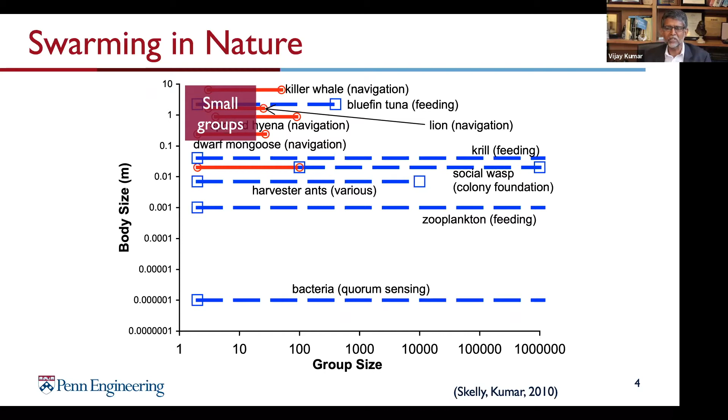But in small groups, individuals can be labeled. They can learn to identify their neighbors. And things are a little different when you get to larger groups, which I'm going to call flocks, with group sizes from 10 to 100, where the combinatorics become very hard.

And yet you want to retain some sense of identity, as opposed to swarms, where you can have abstractions where you ignore the details of the individual, ignore the labels, and assume that the agents are altruistic, replaceable, maybe even anonymous, with communication that's completely indirect.

So in some sense, the hard problems are in the middle. At the smaller end of group size, you can brute force the combinatorics, you can come up with calculations, and even if it's NP hard, you can kind of do it by force. At the other end, with swarms, you can develop abstractions that allow you to model the group without worrying about the details of individuals. But in the middle, the numbers are large, and you cannot ignore the individuals. That's where some of the challenges arrive.

Going back to swarms, the easiest way to build a swarm, as Professor Sitti taught us, is to think about this in the context of bacterial swarms. These are experiments conducted by Salman. The easiest way to build a swarm is to build a cell culture on a petri dish on an agar base, using Serratia marcescens, and you'll see the swarming behavior develop naturally as the bacterial culture grows.

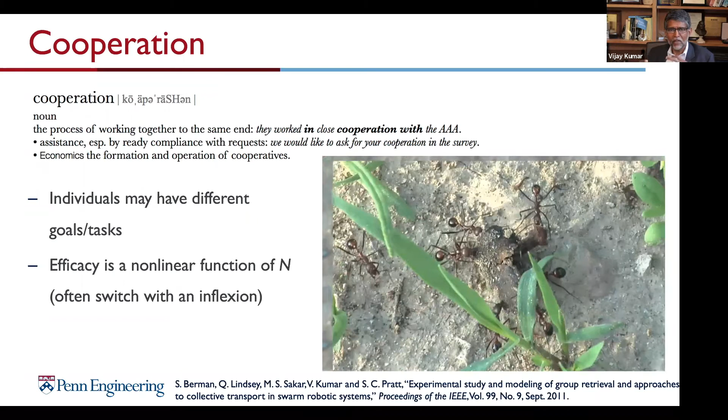If you plot the success of this task as a function of n, you'll see there's a critical number beyond which suddenly the performance ramps up—so there's an inflection point. This is an example of cooperation: again, homogeneous agents performing a task, modest numbers, not swarms, not coordination, but where you really need to think about individuals' roles in these tasks.

And then finally, something we're working on which I don't have time to talk about is more collaborative behavior. We all know about these airplanes that have disappeared underwater. Think about the problem of finding a big jetliner in the Indian Ocean. This is not a simple task. You might think about using underwater robots to find this airplane.

You might think about surface robots—autonomous surface vehicles, small vehicles, large vehicles. You might think about aerial vehicles providing support for search, perhaps vehicles flying low to the ground. You might have communication links that are sporadic, that can easily get broken, sometimes short range, sometimes long range. You want to detect, classify, and localize targets.

This is a complex problem where none of the paradigms I spoke about earlier can be easily used. You really need to think about different types of agents, their different capabilities, and this is where collaboration comes in. So just an overview of the field.

Let me continue the overview by telling you a little bit about swarms of microaerial vehicles. There's a lot of cool work being done at EPFL, certainly with Professor Dario Floreano's group and others. I'm going to talk about something where the mechanical innovation is not that great—maybe it was great 10, 12 years ago when we were first working in this area, but now this is all commoditized, off the shelf.

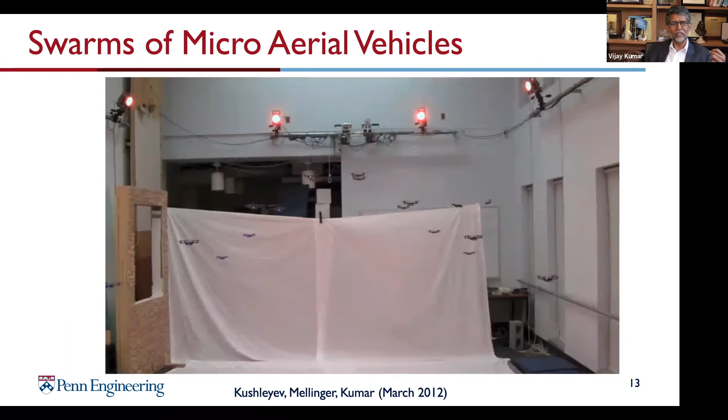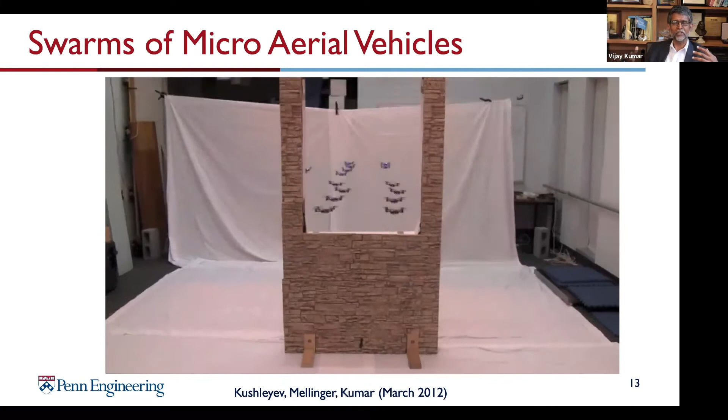I want to start with, to my knowledge, the first known demonstration of swarms. This happened in our lab back in December of 2011, where we were able to use 20 microaerial vehicles, admittedly in an indoor environment with a motion capture system, where individual vehicles knew exactly where they were relative to their neighbors. You see simple tasks where they change formation to accommodate obstacles, in an environment that is completely known and characterized. The big challenge is to control 20 vehicles with simple group abstractions that an individual could program without worrying about the combinatorics of the 20 vehicles.

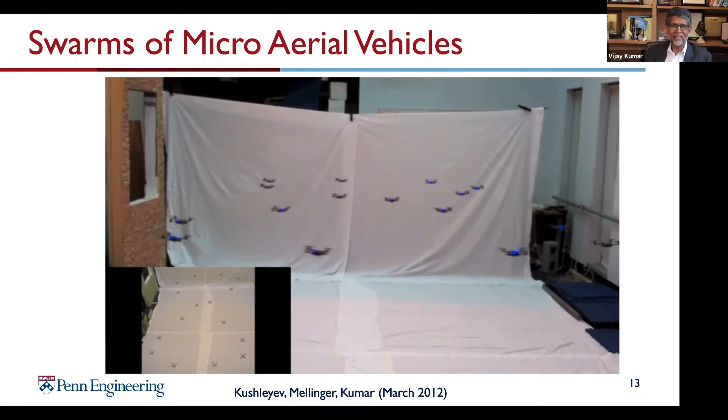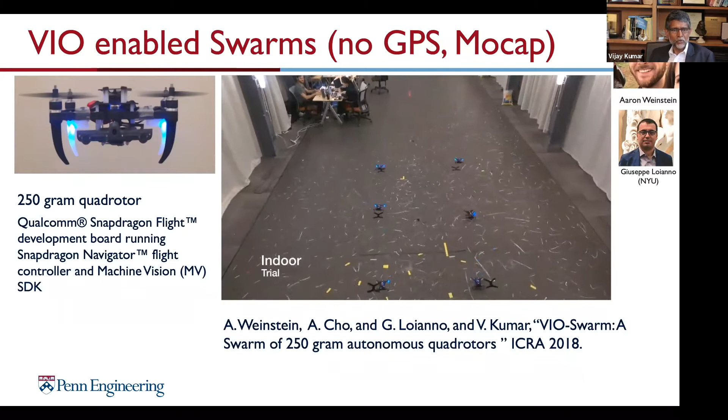You'll see something similar, but now without GPS or mocap. This is work that relies on the Snapdragon chipset developed by Qualcomm, a collaboration with Qualcomm, where essentially we use the bare bones, the guts of a smartphone to do visual odometry and integrate that to get trajectories, and then feedback control based on trajectories that are pre-planned.

All the compute, all the sensing is running on board. There's no GPS, no motion capture camera system. And again, in this case, Aaron Weinstein, former student, and now Giuseppe Loianno, who's a professor at NYU, they can control the swarm by simply specifying the pattern and where it needs to go. The robots decide which robot needs to go to what location and how and when, in order to form the pattern in a safe way.

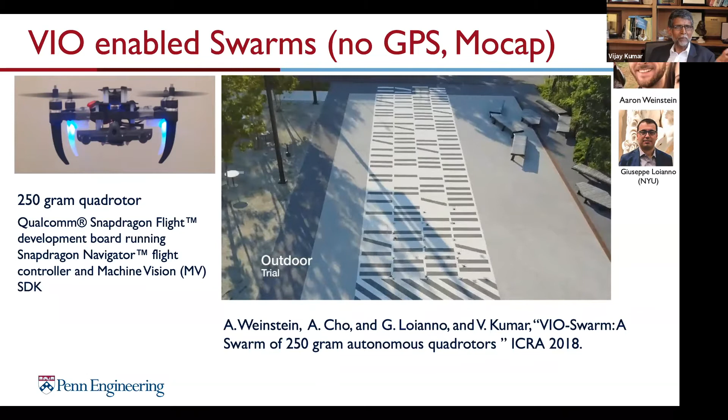So this was probably the first of the set of swarms without any external infrastructure. And again, I'm going to go back to my chart to show that, yes, we did this back in 2017, 2018, but there are a lot more groups now, groups like at Delft and Hungary that have actually gone further ahead in terms of the number of microaerial vehicles.

This is going really well, except there's some degree of centralization. Almost all these efforts, I think all of them, require some kind of a base station with ad hoc communication network and some centralized computation. So the main question we are trying now to address is, how do we do all of this in the wild?

The key challenge is to essentially have better perception action loops. Robots must be able to see and identify their neighbors and then take actions based on what they see. This is not a new idea in robotics. Certainly, observations inform actions, and then the reverse is also true. If I want better perception, I can move to get better observations.

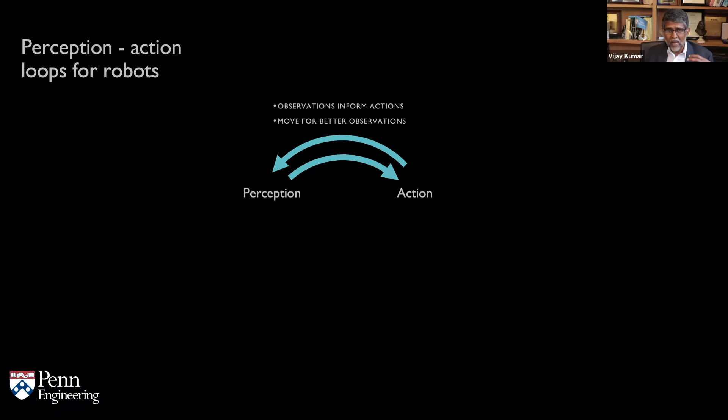But what is new is the challenge of synthesizing perception action communication loops, where we think about communication in the same way we think about perception. We want to communicate to make better observations so that two agents, maybe three agents, can get a better observation than a single agent. Likewise, the perception can be shared.

The observations can be shared to get better estimates. Communication loops can inform actions. And then if you cannot communicate with an agent, you can actually move to communicate with the agent. So one question is, how can we design perception action communication loops to enable more capable swarms?

And the first thing you realize is that you need an autonomy stack that works on a lightweight platform. Otherwise, all of this doesn't work. You need perception, action and communication working on platforms. Here's a bunch of platforms we've built over the last 10 years.

And one failure with rotorcrafts is when you try to hover, which is the best mechanism for fast maneuverability in unstructured environments, you end up consuming roughly 200 watts per kilo. I'm a mechanical engineer. I understand that this is inefficient, and we should be looking to more efficient mechanisms like the ones that people at EPFL are working on.

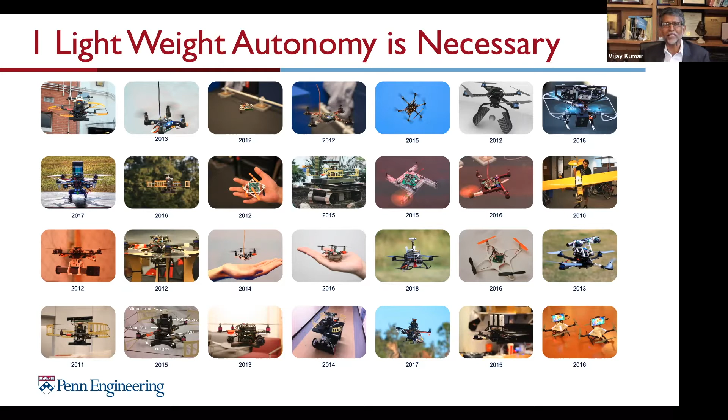But if you want to build swarms, this is the easiest way to build lots and lots of vehicles and get them working together. I want to highlight three platforms.

The one on the left side is equipped with a LiDAR, a stereo camera, an Intel i7 CPU, and can do fast navigation, 5 to 10 meters per second in cluttered environments. The one on the right side is the lightest and smallest platform, but of course it needs a motion capture camera system to operate. The one in the middle is 1.3 kilos.

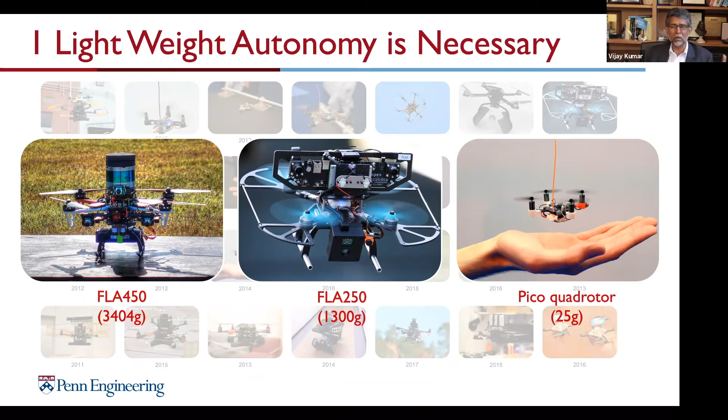It is equipped with a stereo camera, a TX2 GPU, NVIDIA TX2 GPU, and an FPGA, no CPU. And this actually works with a depth camera, a 3D camera, allowing you to navigate fairly complex environments, but doesn't work in bright sunlight. So a lot of trade-offs here.

And we've been trying to make these vehicles smaller and smaller. The smallest vehicle, again leveraging the Qualcomm Snapdragon chipset, is a 133 gram quadrotor, very impressive motors, impressive thrust to weight ratio, capable of fast maneuvering. I'll show you some results in a minute.

But again, trying to get everything that we need for perception action communication loops on board. So this particular vehicle has a forward-facing stereo camera, a downward-facing wide-angle camera for visual odometry mostly, and is able to navigate at speeds of roughly 5 meters per second.

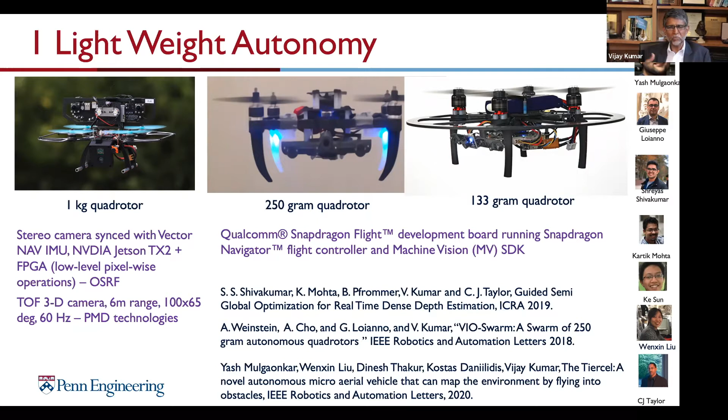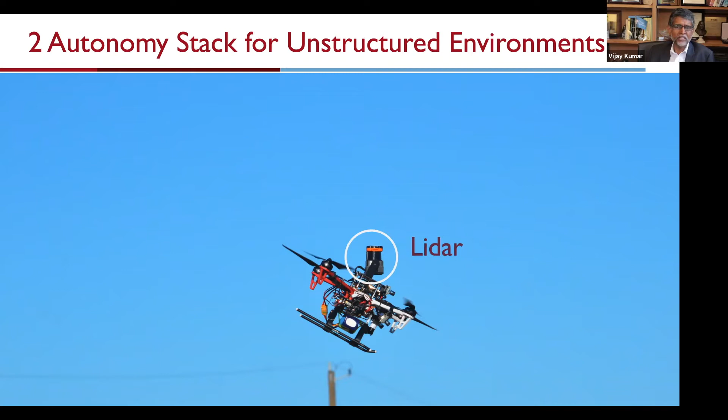So why is the autonomy stack challenging? Again, much of the success we've had is based on platforms that are equipped with cameras and IMU and with LiDARs. The cameras and IMUs are great for state estimation, but LiDARs are essential for planning fast movements in cluttered environments. And basically what we end up doing is trying to solve the time optimal control problem or the minimum snap problem in real time through complex environments.

So what makes this problem complicated?

Well, the environment is not fully known up front. You only know it to a finite horizon. You're operating in extremely cluttered environments. The environment is non-convex. Actually, it's even worse because you can think about different trajectories and they'll lie in different homology classes, and you want to reason about that. The relative degree is a fourth degree system, and there are input and state constraints that make it really challenging to solve this in real time.

So this is all of this we want to do on board in an ideal world. I want to show you an example of how we do this. This is an experiment where you will see 5 meters per second flight, roughly 700 meters to the target and back.

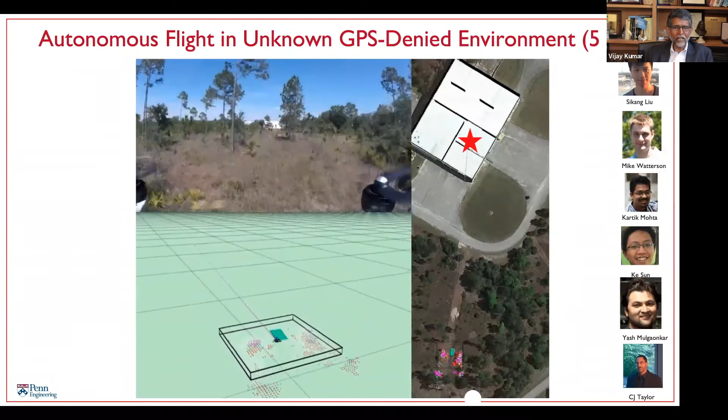The target is given to us. It's this asterisk that you see on the right side overlaid on the Google Earth image. But what the robot knows is in the bottom left. What it sees is on the top left. You'll see it building a local map. Remember, it has no GPS. It only knows that there's a target, an approximate location. It has to go find the target, come back, report back to base. The target happens to be a red barrel.

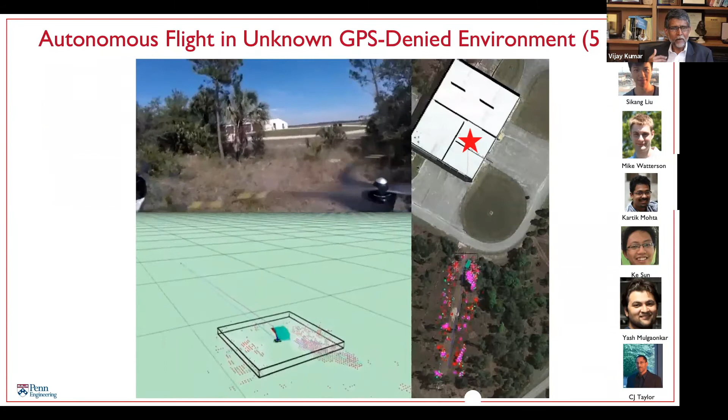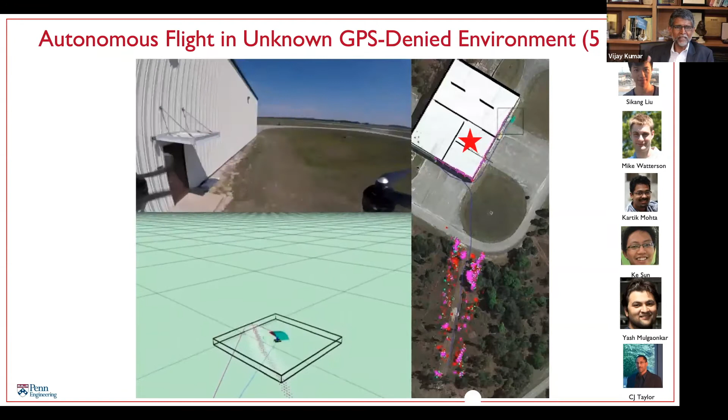You will see it plan motions that allow it to go around the trees in real time. You'll see a lot of rolling and pitching, and that's because of the dynamics and reacting to obstacles that are just seen. It gets close to the building. It still knows that the target is somewhere close by, but it can't see the target because the target is on the other side of this wall. So it patiently skirts the building. The speed here is a little lower, maybe 3 meters per second. When it turns the corner, it'll find an opening, and you'll see it adjust from the bright illumination outdoors to the dimly lit indoors, adjusting to the contrast.

Many obstacles have been placed in the way, obstacles that we're not aware of. By the way, this is part of a DARPA-sponsored project, and so they would set up this environment, and we had to go in and find the object of interest. Here you'll see the object of interest happens to be a red barrel, very easy to identify. That's not the challenge. The challenge is really going to the target, locating it as quickly as possible, coming back to base and reporting where the target is. This is an obvious fit for search and rescue type missions where you're trying to look for objects of interest, perhaps human beings, perhaps explosives that have been placed there by bad actors.

And you want to come back and say, this is where everything is. So you'll see it come back, and at every time it's capturing local images and it's building a map, but it doesn't store the map. If you really wanted the map, you'd have to reconstruct it offline. The goal here is to go as quickly as possible to get the object of interest.

So this is the autonomy stack that we want to run on robots, and it becomes really, really hard as you scale things down because of inadequate sensing and inadequate computing. But there are some benefits of scaling down, and the main benefit is, of course, something we know from nature.

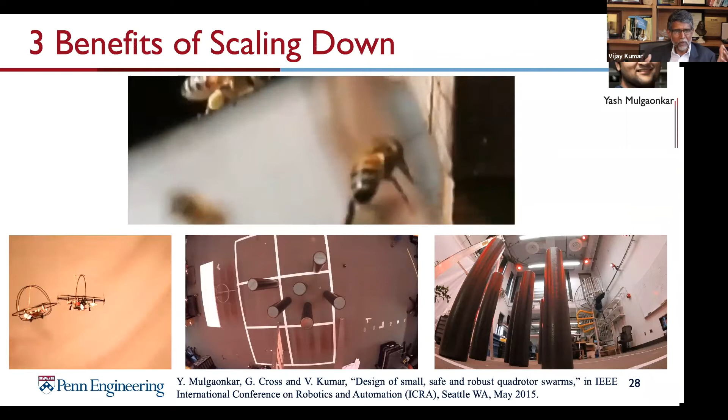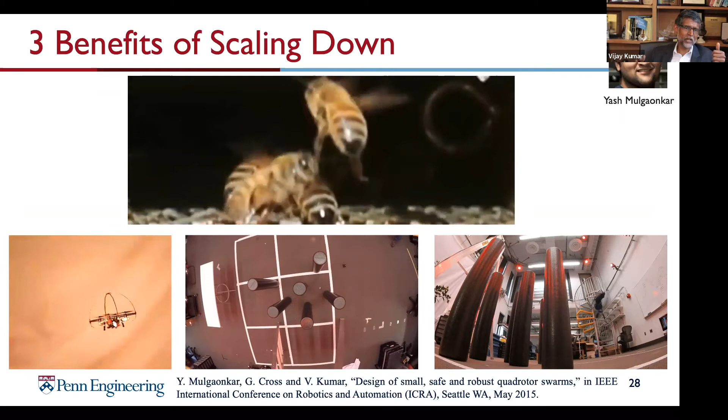So this is a swarm of honeybees, and because of the low inertia, you can see that the collisions that may occur have a very low penalty. On the bottom left, we'll try to recreate these with our 25-gram micro UAVs with planned mid-air collisions. These videos are slowed down by a factor of 20, and you'll see perhaps the first planned mid-air collisions, and the robots recovering from that quite easily. Again, the cages are just to make sure that the propellers don't get entangled. And on the bottom, you'll see some of these experiments being conducted in obstacle-filled landscape.

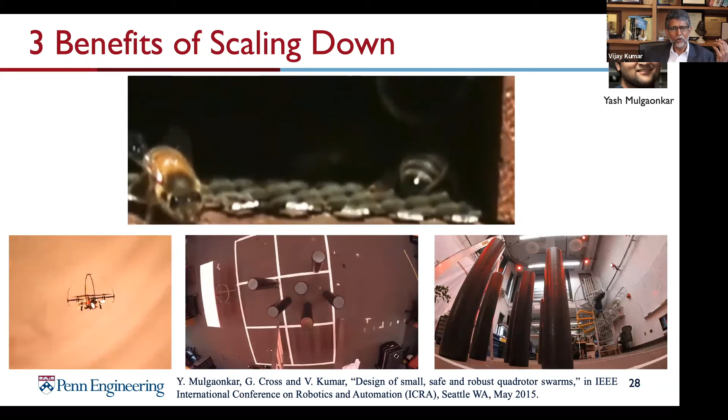And planning is very different. Autonomy is very different. You don't have to worry about the exact location of the obstacles, and you can afford to sustain collisions.

So this is really where we're headed to, and our first attempt is to be able to do this without the motion capture camera system, where you'll see the Tiercel platform is able to detect collisions and react to it, admittedly much slower. This is a speed of 1 meter per second, about half walking speed, based solely on inertial measurement units and the images that you see on the bottom right that the robots are collecting.

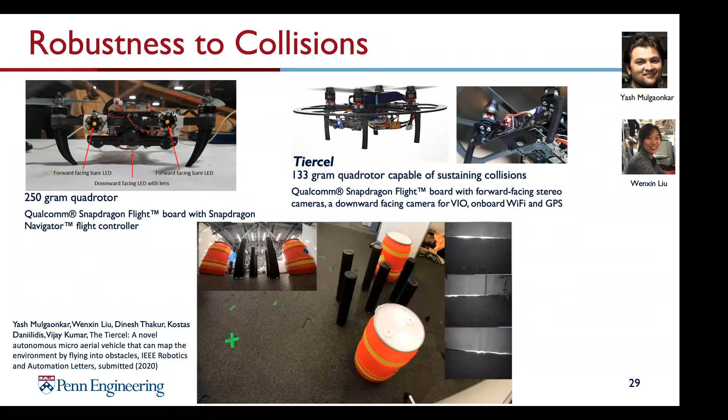Every time you detect a collision, you know that your visual odometry suffers a discontinuity, and you need to learn to recognize that discontinuity and develop a filter that allows you to navigate in the presence of this collision. This is work by Wenxin Liu and Yash Mulgaonkar, who designed all these platforms.

The fourth thing we're trying to do is develop open source experimental platforms that facilitate collaborative autonomy. In robotics, the availability of platforms has always driven very interesting research. What you see here are a whole host of platforms enabled by the Snapdragon chipset, and also a company we collaborate with, a small startup called ModalAI. ModalAI provides us an integrated hardware setup that allows you to control the motors and also get the VIO working robustly on these small scale platforms.

Each of these platforms is actually now available open source, both the reference hardware design and the software design. You can also equip them with lights, and on the top right you'll see them navigating in smoke-filled environments and environments where water's dripping from the ceiling. We move at more modest speeds here because all the imaging is being done by stereo cameras, and we move very cautiously in these cluttered environments.

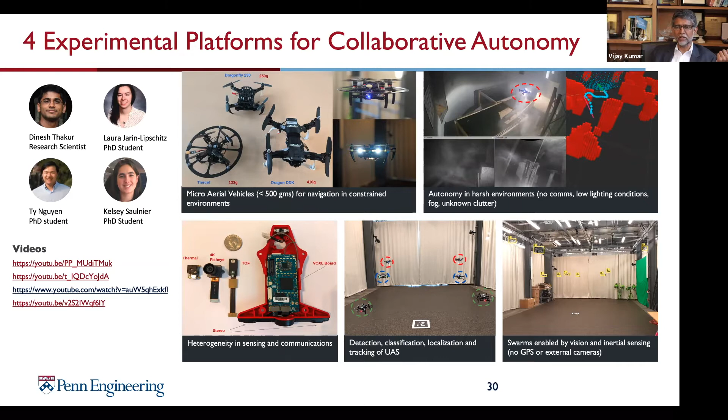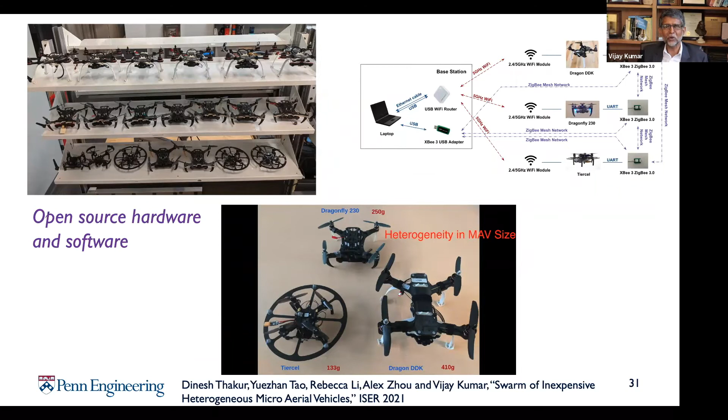So I'll show you a video of these robots. Actually, COVID was a blessing in disguise. We had to leave our labs, which meant we had to operate wherever we were. You'll see a lot of the students set up experiments in their homes, as you'll see in a minute.

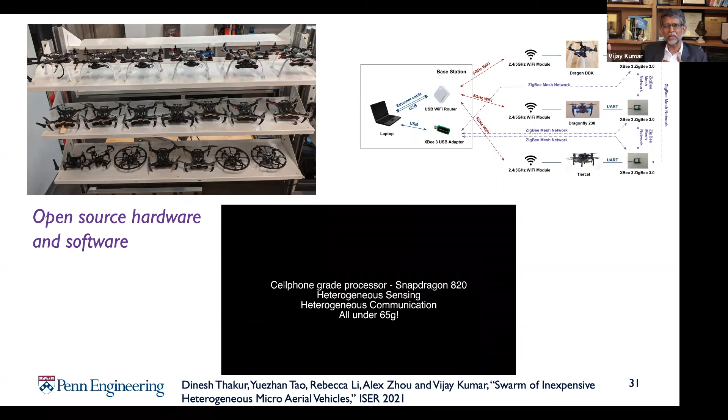These robots have a combination of Wi-Fi and Zigbee mesh networks with both peer-to-peer communication and communication to a server. The net payload, besides the electromechanical components, is only 65 grams. We use stereo cameras facing forward, downward facing cameras for navigation, also equipped with a thermal camera or time of flight sensor. So these are now operating in Dinesh's living room.

The only thing you see in terms of external infrastructure is essentially an AprilTag. The main reason for the AprilTag is because they need to know where the origin is. So once they take off, they don't need to worry about the origin, but they do keep track of it anytime they fly over it.

You'll see a 3-robot team. Again, this can operate anywhere you want. It doesn't even have to be an AprilTag, it could be any object that's easy to identify. But those are landmarks that are kind of essential in a robot world, since we don't know a priori any reference point for an origin.

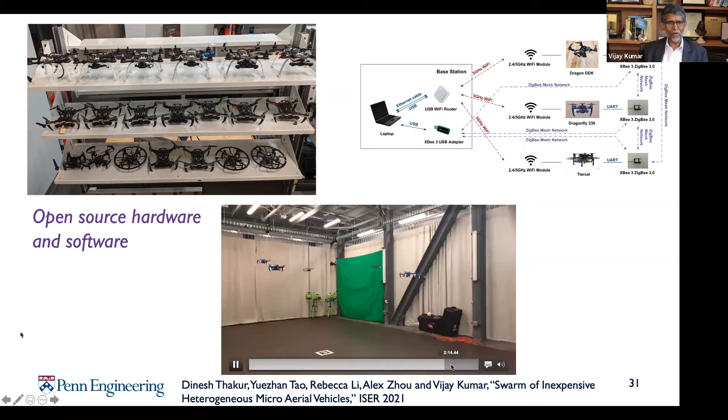Let me fast forward this. I do want to show you some operation outdoors. So this is in the laboratory - again, we happen to have a Vicon camera system here, but it's only used for ground truth measurements. Then you'll see outdoor experiments. I'm sorry, it's not there in this video, but this is the swarm of UAVs we have built, and again it's available on our GitHub repository.

The last thing I want to talk about very briefly is how to design these perception action communication loops for multiple heterogeneous vehicles. What we really were working towards is a comprehensive framework and algorithms for these PAC loops. Our strategy was motivated by this very simple task.

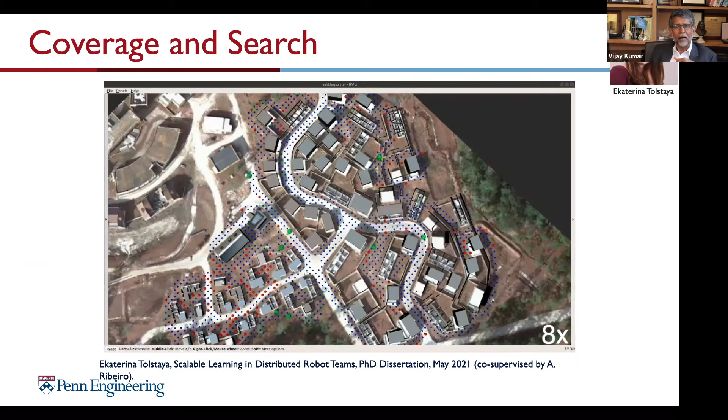Let me conclude by just saying the one thing I haven't talked about, which is heterogeneity, although we're building heterogeneous platforms. I think this is an extremely interesting area of work.

Some of the early work in this area was done at EPFL by my good friend Alcherio, on how heterogeneous agents can enable collaborative behavior. I think this is a very intriguing area for research and something we are working on.

But I should conclude by saying that the future really is exciting. As you think about where technology is going, the price to performance ratio of sensing, communication, and computation is falling and will continue to fall. I think that means a lower barrier to entry for all of us working in this field.

I think 5G represents a really, really interesting inflection point. This idea that I've adhered to thus far, that all the computing needs to be done at the edge in order to ensure reliability and safety, may not be the right paradigm anymore. Maybe a lot of this could be outsourced to the cloud. And maybe what we think about in terms of swarms in the wild need not be all about edge computing. Some of it could be done on a cloud, which could develop organically.

The only area where I don't have great news is on the battery front. Despite what luminaries like Elon Musk tell you, battery technology hasn't changed substantially. Yes, we know how to manufacture large-scale batteries at lower cost, but it's basically the same chemistry.